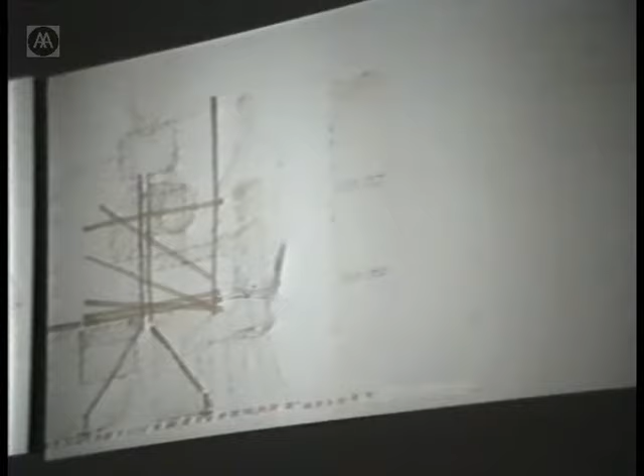Selecting from the many, many drawings that have been done on that project - many by myself, many by others, in our own office and in Tecno's office. And picking these really because they were the ones that Tecno selected of a sequence, extracts from a sequence that I did to try and communicate some of the thinking.

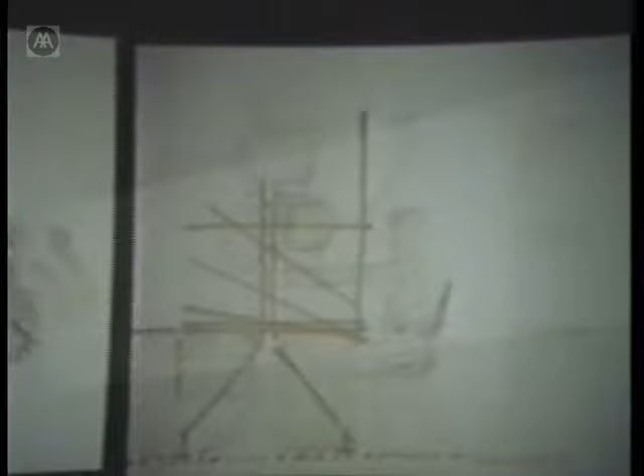Really an inventory of pieces that would come together. Heavy dependence on steel tube for economy, speed, and strength, and junction pieces. But not to talk about the technology, rather the lifestyle.

Two themes: the one on the left as we go through really being individual spaces, individual pieces, like sculpture in space. The sequence on the right-hand side being elements that would come together to make an environment, complete with its own services, its lighting. The last one was called by the director in Tecno, the Last Supper - the big group around the conference table.

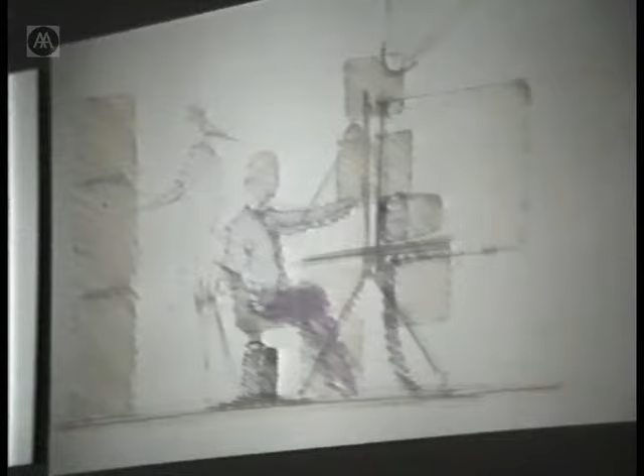Moving down in scale around suppers, the idea that it would respond not only to the right-hand side, creating environments for workstations, dealer desks, and so on, but on the left, dinner by candlelight or coffee tables.

And finally moving through to the two sample elements that were previewed in Milan. The freestanding table, many, many variations on it, and the kind of island units, the clusters that can make and create their own environments.

The launch in Milan was a feast of very simple food, beautifully prepared by those amazing chefs. And if I use the chef and the food and the restaurant analogy, it reminds me that in some countries the chef is a more esteemed, more respected person. Certainly in Italy, certainly in France and other countries I can think of, Japan. That's not so true in this country. And what goes for chefs also goes for architects too.

I think it runs a little deeper than that. I think the respect and the esteem for people who make things and service things is also at a pretty low ebb, and has been for a long time. And I find that very difficult to believe, because the creation, the making of anything seems to me one of the most noblest professions. And if we have achieved anything as architects, it's because of a genuine humility and respect for the people who make things.

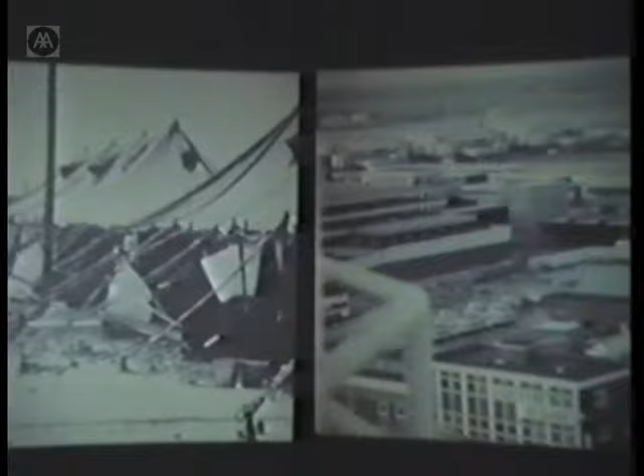Some meals are not humble, cozy, family affairs. They're grand state occasions, huge numbers, and they become more demanding because the distances are greater, and quality control is infinitely more difficult. Control of any kind is more difficult. And what goes for a banquet must surely go for a building too, especially buildings in a time of dramatic change. And I can't think of anything that signifies dramatic change in the 20th century more dramatically than an international airport.

And so this sequence is extracted from presentations made to British Airports Authority in connection with our work on the third London airport at Stansted. And maybe looking at Heathrow on the left in the 1940s, and Heathrow as it is on the right now, says more about dramatic and volatile change than anything I could say.

We went back through time. We contemplated the shift from an elitist, leisured class transport between the wars for few numbers to the explosion of mass travel, cheap travel for everyone as a prerogative, and everything that went with it, and all the stress. And it seemed that airports should not be about throughputs in terms of planes per hour, baggage per minute, but should be about people. I noticed coming to the office this afternoon, there was a kind of banner headline, 'Man goes on rampage in Heathrow.' The statistics around coronary arrests in airports is absolutely staggering. They are very stressful places.

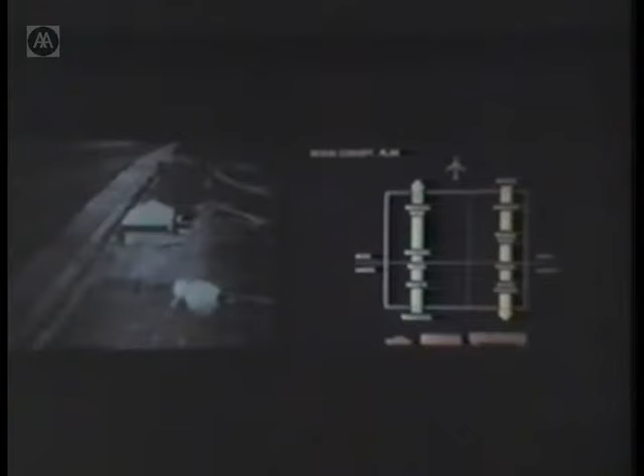Going back to an early airport, this I think is either Dallas or Houston in the early 30s, on the left-hand side. You were in no doubt where you were, no problems of orientation. You arrived by car, in this instance along a dirt track, and you saw the aircraft and walked towards it. And when you came back, you saw the car and walked towards it. Very, very simple.

You didn't need graphic designers to try and lead you through a maze to negotiate the standard international airport. So we endeavored to see whether we could find that kind of clarity and order, because that seems to be a prime role, bringing a sense of order into something that otherwise is anarchy and chaos. If that isn't also about architecture, it seems to me very fundamental.

So here, the idea of a large room which would put people first. You would walk towards the aircraft, there would be a land side and an air side, clearly visible as such, seemed to be in the spirit of going back to basics.

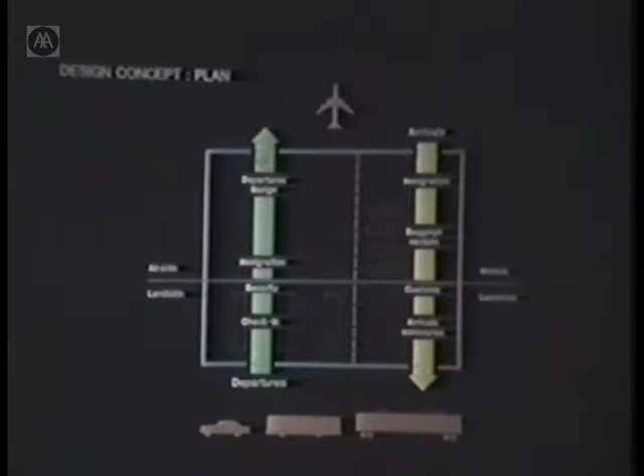That diagram in plan was shown to the British Airports Authority Board about a year and a half ago, nearly 2 years ago, in this form, with the proposition that you would enter on the left and walk across towards the aircraft. Minimum walking distance, no level changes.

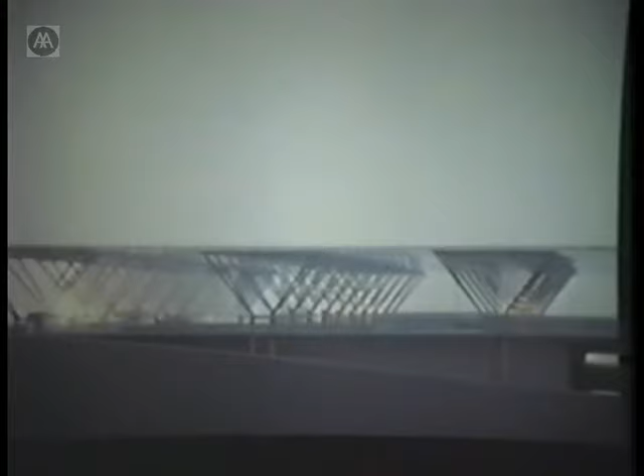The baggage would go down below, because the baggage doesn't know the difference if it has to change level, but people do. And it would also end up at the right point, because the baggage wants to get onto a truck which will take it to the aircraft. People want to get onto the aircraft at that level, or through some swift transportation system that will change the levels for them. In the final development, a track transit system.

Also, the roof would let the light through, and you try and achieve the most beautiful quality of light that the resources, the funds, the materials would allow you.

And you'd put all the things that drive that building in the basement where you could get at them very easily, so nothing really got in the way. So you'd take all the cobwebs out of the ceiling, all that festoon work of ducts, heavy metal, engineers' battleground, fluorescent light tubes, all the things that, in my personal view, get in the way and mar the potential for creating something that would be more uplifting and more beautiful.

That attempt at integration of the services, the lighting, into the structural fabric, that integration, I think is a relatively early preoccupation and picks up chords from the Lyons project, where the heating was interwoven into the floor fabric and the light tubes into the corrugations.

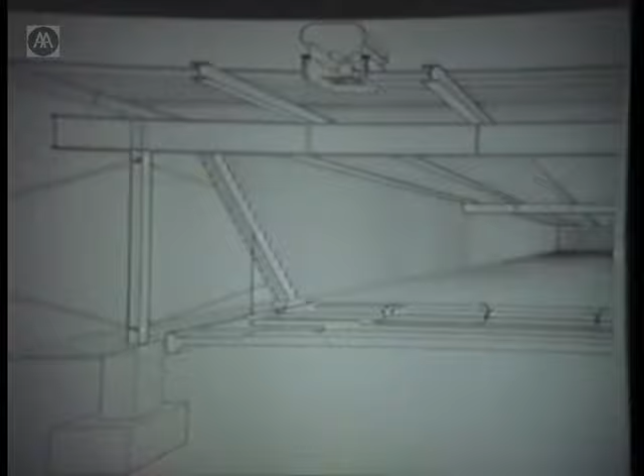And essentially, the space and the articulation, the modulation of that space by the structure was an important concern. And I think that that is something that has developed over a period of time.

The more recent study here from the Frankfurt project shows the attempt to refine, to skinny down that structure, to hone it, and again within that plane to integrate the services, the lighting, natural light, artificial light, and also a concern about the way that building would start to express itself more dramatically in terms of entrances than other attempts at that in the past, and also the way that it would relate to the ground.

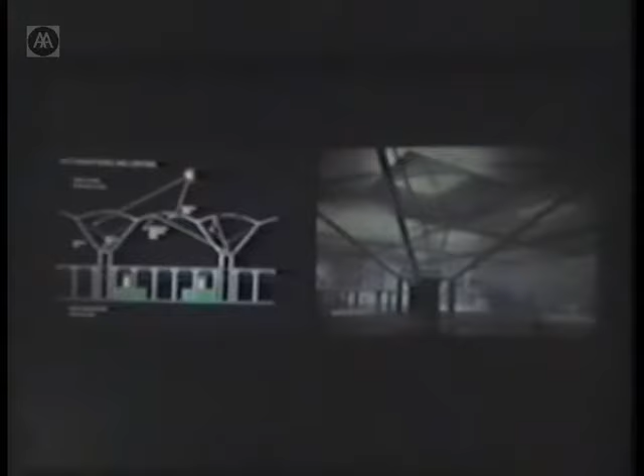Coming back to that diagram, we can see a part of the building diagrammed on the left, so that at the base of those structural trees, which would enable you to have a wide span structure at 36 meters, that in economy terms would break that down halfway to 18 meters, shells which would admit the light.

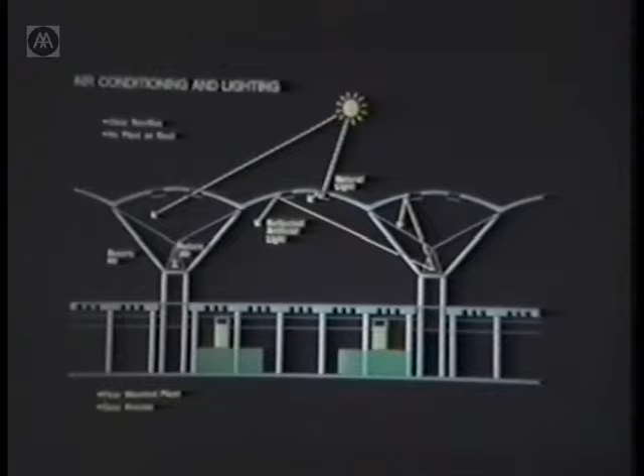You would also get controlled shafts of sunlight. And then, as the lighting level diminished outside, gradually, the internal artificial light located at the base of the trees would gradually come up, so that roof from the inside would act as a reflector. So you would get reflected light gently glowing and illuminating the whole space.

The interest in light, I can pick back to this project in terms of trying to pull light, scoop light, reflect sunlight into the heart of a deeper building. This is the Olsen project in the early 70s.

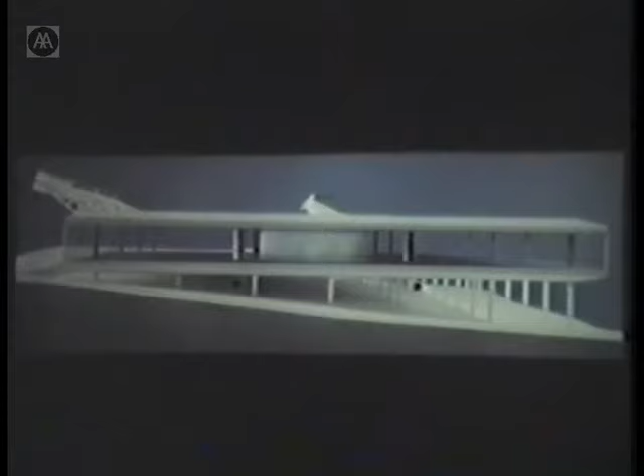The manifestation of that idea developed later in terms of the bank with an external array of mirrors, sunscoop as we called it, relating to an internal array of mirrors at the top of that main space.

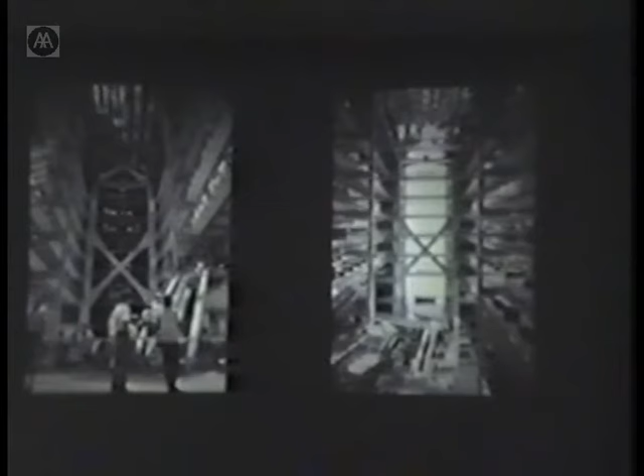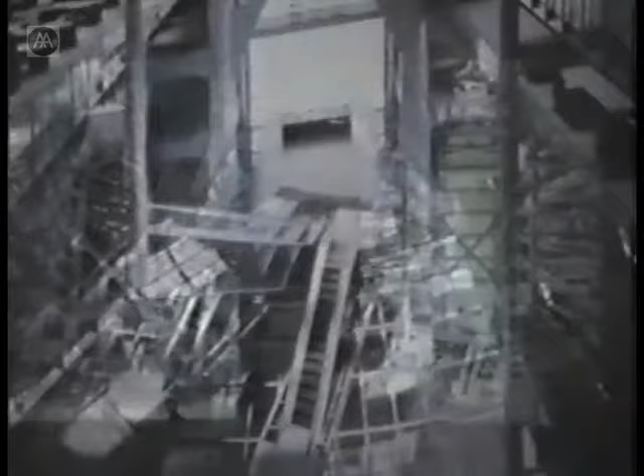Again, an attempt to transform the everyday use of a banking hall for cashing a check from something that would be a kind of humdrum experience to something that might actually be uplifting, attempting to sum up the spirit of that organization through the use of space. Many other things as well, but light is a powerful ingredient.

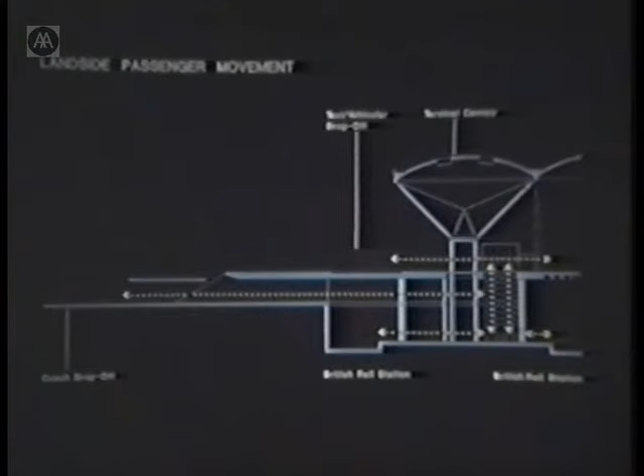An increasing concern about the way that functionally you enter buildings, so that the entrance will announce itself. If I talk about integration here, the diagram on the left shows the railway station, because this is linked to Liverpool Street, pulled physically into the building, so it's not a remote station. The actual station is part of the airport. Again, trying to integrate and pull those transportation systems to knit them together.

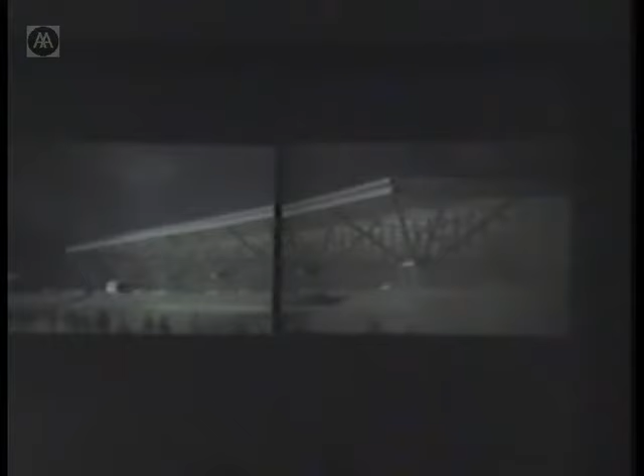If we look at the entrance here, this building intended to grow lengthwise, the attempt to suppress and control the inevitable visual chaos of large-scale parking and coach movements by, I suppose, an interpretation of the 18th century device of a ha-ha, to depress it just enough so that it's out of the sight lines. The building then sits on the high ground, which also enables economically that undercroft to be incorporated into the building.

If that was the land side, this is the air side, which now handles the track transit system, which takes you, effects the changes of level, and takes you to the satellites. And then a montage giving an impression of how the building might feel at night.

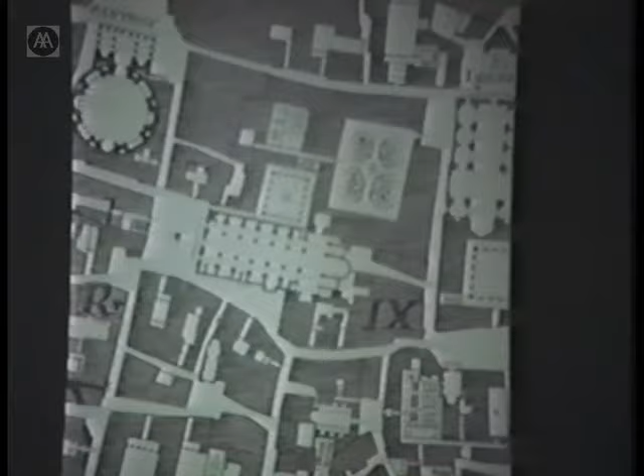I've always had a personal interest in what I would call urban linkages. I took this slide on the left of the Galleria, one of my favorite places and spaces, in 1958 as a student, and I've used it continually and revisited many times, fascinated by the way urban routes can penetrate through building blocks and add another dimension and ingredient of public involvement in what would otherwise be private domains.

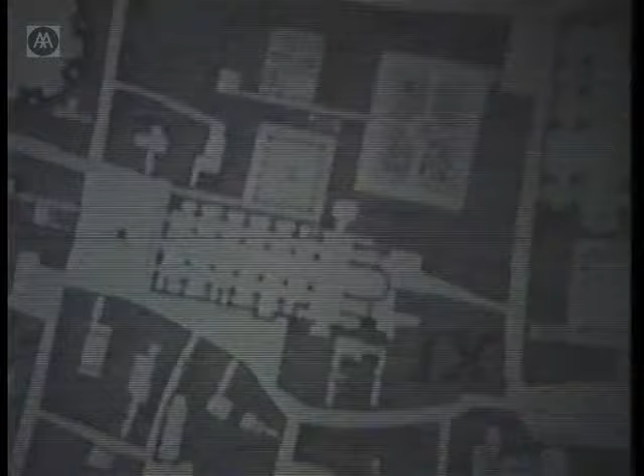The Nolli plan of Rome on the right-hand side, and some recent projects effecting a shift, a change, more varied opportunities.

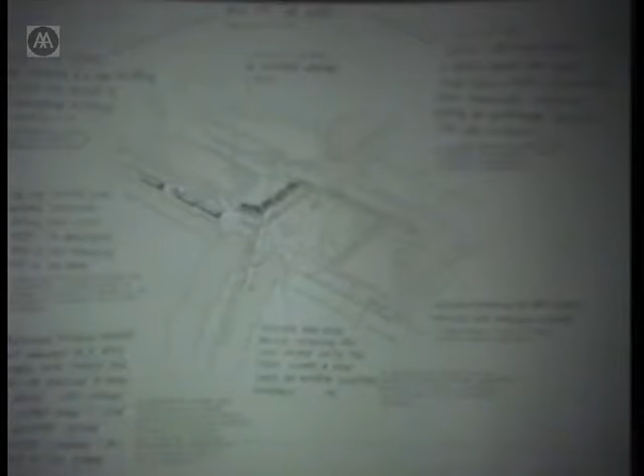For example, the Nîmes project here, an international competition, was to develop a combined gallery for contemporary art and the médiathèque on a site opposite the Maison Carrée, this astounding Roman temple. On the site opposite, a car park, originally occupied by an opera house built the last century, demolished by fire almost totally in 1953.

Our proposition was that the space was great. The original building, which had since burnt down, just about got it right in terms of its height and massing. The spaces left on the edge were good streets, potentially good streets, and it really was fantastic - one should respect it and be informed by the scale of what had gone before.

And the page on the right makes those points, one of a number of pages prepared for the original competition report. It's interesting that in a competition there can be such an extraordinary diversity of approaches.

For example, in this newspaper cutting here is the scheme we proposed, which recreated dimensionally the original facade, respected the geometry, recreated the streets around the edge, and left this space totally alone as it was, even suggesting they should keep the traffic running through it, for reasons I won't go into now.

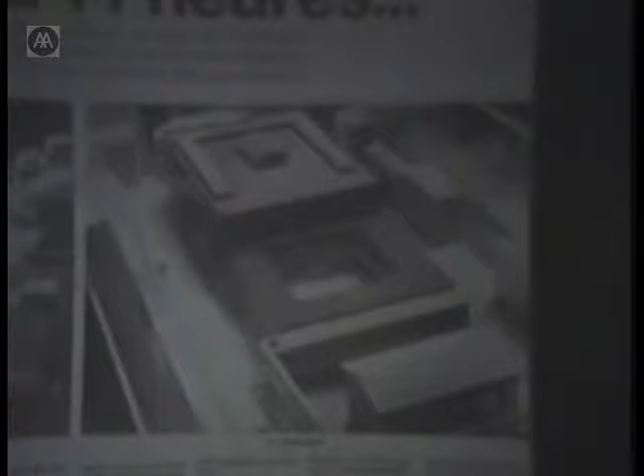Jean Nouvel, an architect I respect enormously, proposed a scheme which in effect created a glass lake and opened up the whole space totally. Cesar Pelli, on the other hand, went right out and across the road and hugged the building. And Frank Gehry created a kind of organic mountain on the site, a kind of mediator building between the temple and the site.

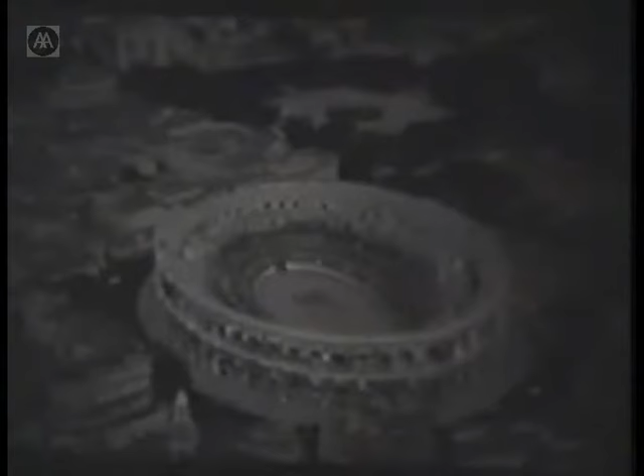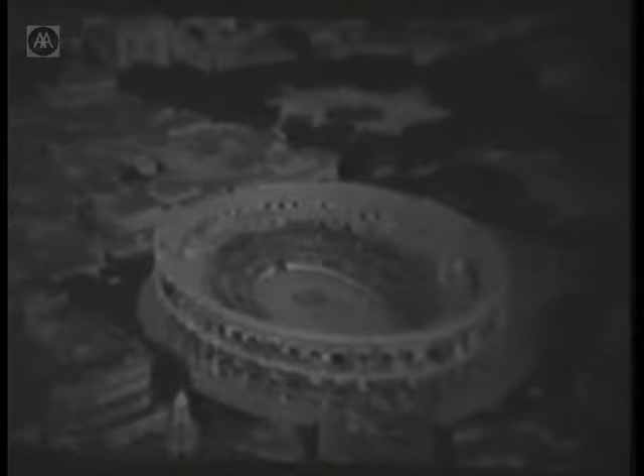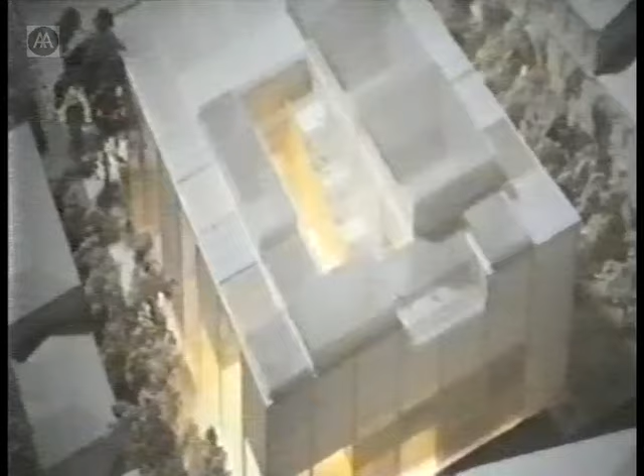The building, as it developed over a period of time, was informed by the tradition of spaces and courtyards in traditional buildings in and around Nîmes, and was a powerful determinant around the idea to create the equivalent of that in the heart of the building as an open space with terraces, with steps, that would enable you as a member of the public to walk through the building and up to the roof terraces without necessarily paying or participating.

Feeling that you had to, as it were, go to a gallery or access the library or do all those amazing things you can do in Médiathèque would be an evening's conversation in itself, drawing some very dramatic differences between attitudes and states of mind towards new generations between France and other countries, and this country in particular.

Fascinating, peripheral conversation. Coming back to the architecture, the roof has been lifted off some of the spaces, revealing on this top floor a sequence of rooms — some tall, some skinny, some fat, a variety of rooms. No attempt to go for a flexible space, although quite possible in terms of a frame structure to reposition walls. The floor below, for temporary exhibitions, has an emphasis on flexibility, but there's a deliberate sequencing of spaces here in this gallery, again with a very strong emphasis on top light.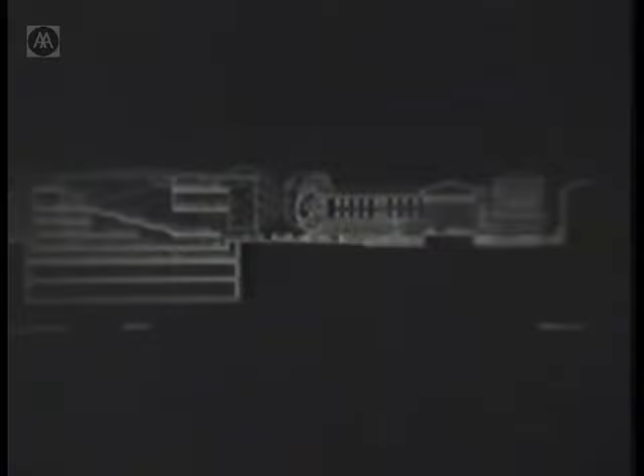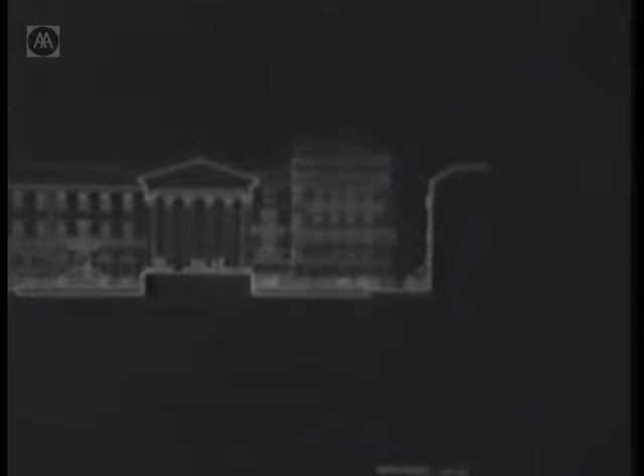The routes you can start to see from the square up through to the roof terraces. You can also see that those activities which need light gravitate towards the top, and those more concerned with storage move down. The building substantially digs into the ground and then pulls back at the sides with many devices to get light through the edges down into the lower reaches of the building, coming back again to that humanizing quality of light, that quest to infuse the spaces in the building at whatever level.

You are never in any doubt in orientation of where you are. You're aware of a very beautiful quality of light, but interestingly not dependent on glass.

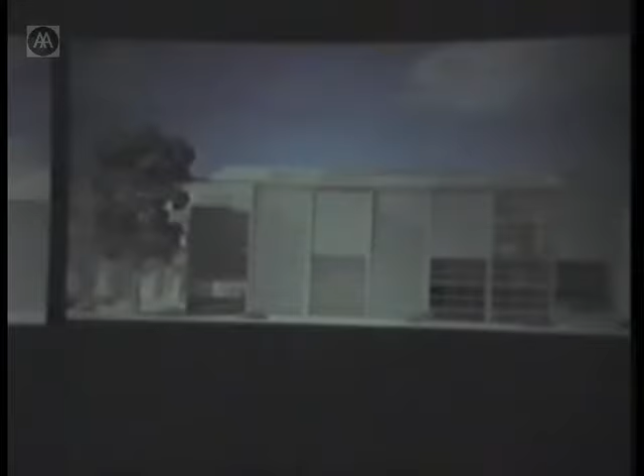Extraordinary beautiful qualities of translucency, relationship with the outside, and an attempt on this building to develop a palette of facade materials that would modulate light by grillages and enable you to see in, filter, provide insulation with layers that would also transmit light of a glowing nature, and in turn the atmosphere would change during the night.

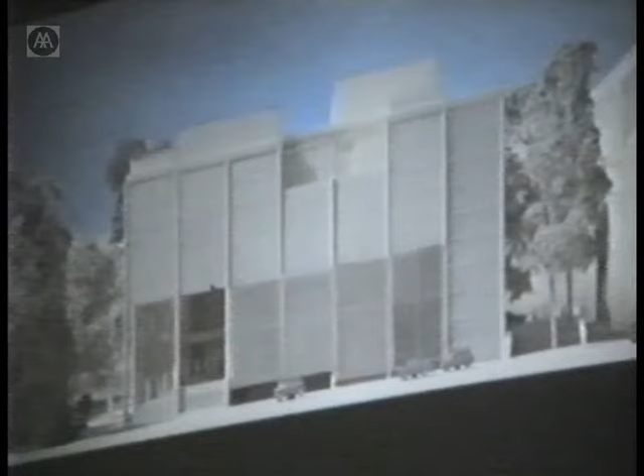The entrances are always pushed back on corners, recessed, with small porticos for protection, for invitation.

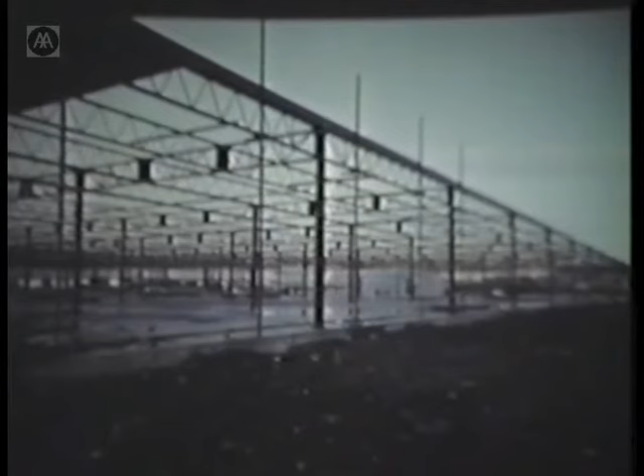In many respects, some quite close parallels with very economical structures. In this instance, on the IBM building, the attempt to find a low-cost structure — the equivalent of that in the south of France is a very simple concrete frame, 6 meters square.

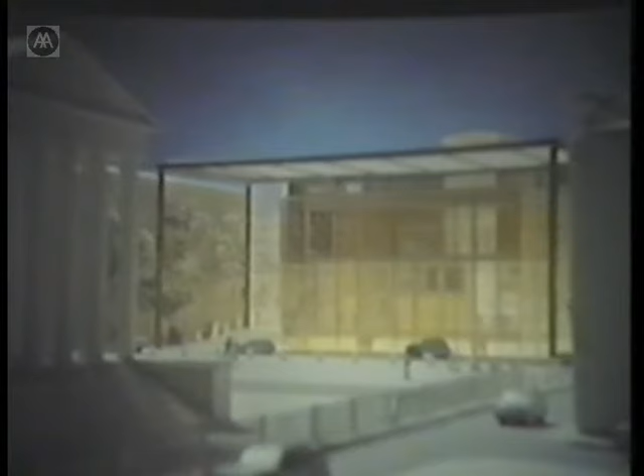For me, this is very much in an ongoing tradition of trying to find simple solutions, and generally a concern for the distribution of a building budget in terms of the priorities.

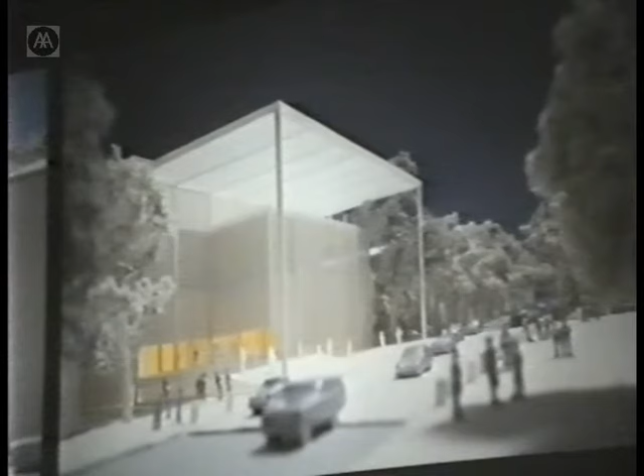These two slides make the point about the manner in which the building can be entered: the gesture of a portico, the protection from the weather, the symbolic welcoming, and also the protection, the shading for the terraces, very much picking up a similar device in 20th century terms to the Maison Carrée itself.

And also being informed by that tradition in France, and particularly in the south, of weather protection, the terrace — the very interesting inside-outside, public-private world of that terrace in terms of the very urban and civilized outdoor cafe.

Moving a little further north to the Langham, the BBC project, as we described it at the outset, a new headquarters for the BBC, which would have to work from the inside out. It would have to answer those very complex requirements, social and technological, of a broadcasting centre in the 20th century moving into the 21st century.

It would obviously, in urban terms, on quite a sensitive and challenging site, have to work from the outside in as well as the inside out. It's really on that urban context that I'm going to touch on, not leaving the rest for granted — it's an important generator, but shifting the emphasis and going back in time.

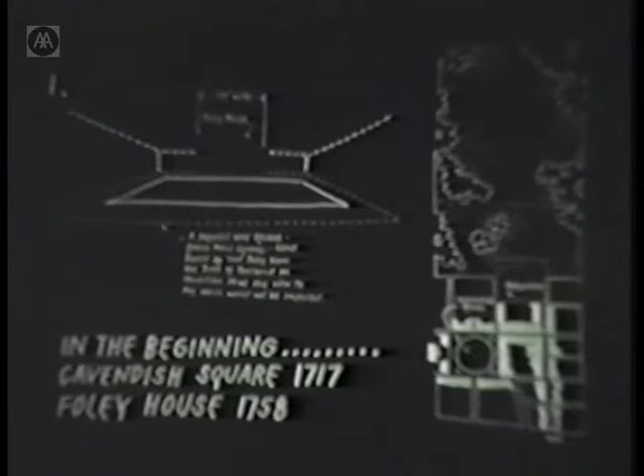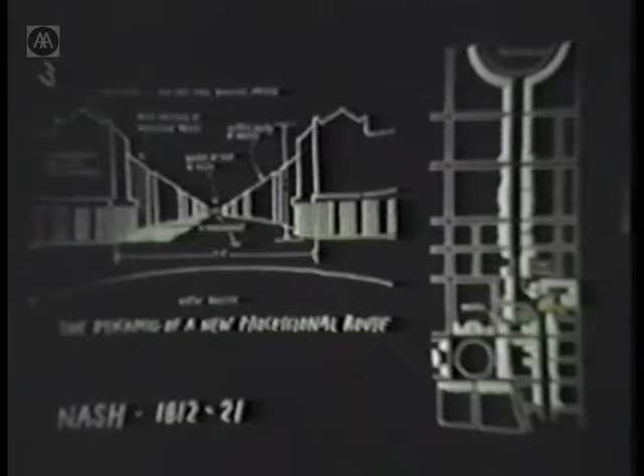What generated Portland Place: the view from Foley House, which originally sat on the Langham site, the transition through the Adam Brothers, the change from a cul-de-sac to a processional route through to the 1920s, somewhere in the middle, and 1864, the blast of the existing Langham Hotel exploding on the site at the head of Portland Place.

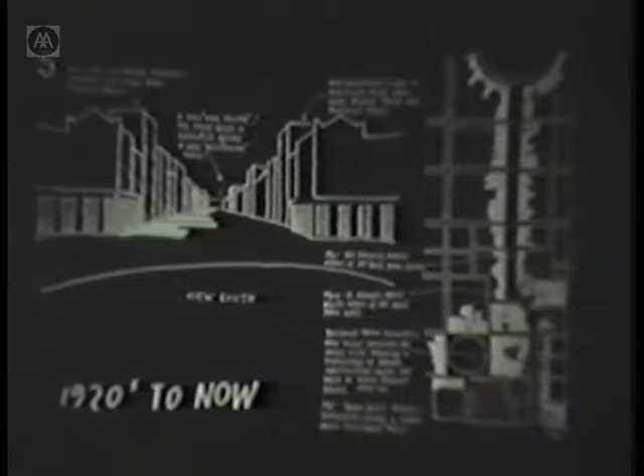Some of the shifts — social, like mass shopping on Regent Street; technological, the steel frame that made it possible, and Portland stone which then moved down as a cladding material into Portland Place, replacing the brick of Adam, which was in turn replaced before that by the stucco of Nash.

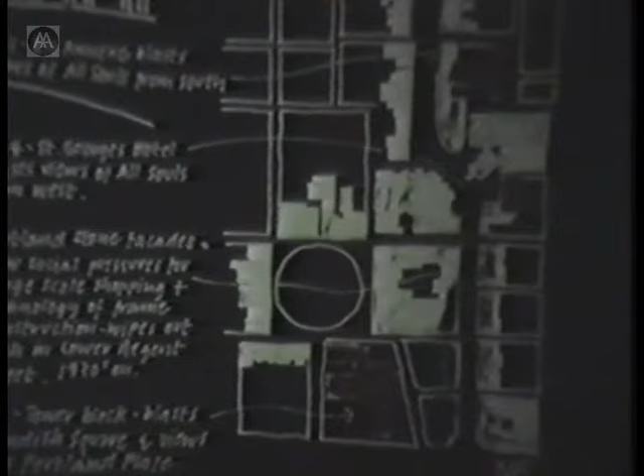In other words, a pattern, totally organic, evolving pattern of change. And very much in that spirit, the replacement of the Langham Hotel for the BBC. The project aborted due to a rationalization program which moved them from the center to the White City.

I guess that really we were responsible for that, because during the competition in our research, which we pursued with vigor after we were appointed, we noted the BBC had some 20 properties within walking distance of the site, and that they had in excess of 1 million square feet. We suggested a rationalization program that would essentially, for good economical reasons as well as problems of communication, strip that away

That process was taken further and consolidated out of the centre into White City and suburbia. It's out of the context of an architectural discussion.

I wear a different hat as a license fee payer and have a view that maybe an institution as hallowed as the BBC should have a central London presence and set an example instead of pulling out to go to suburbia, to the dogs to White City, if you like. But that is another aspect.

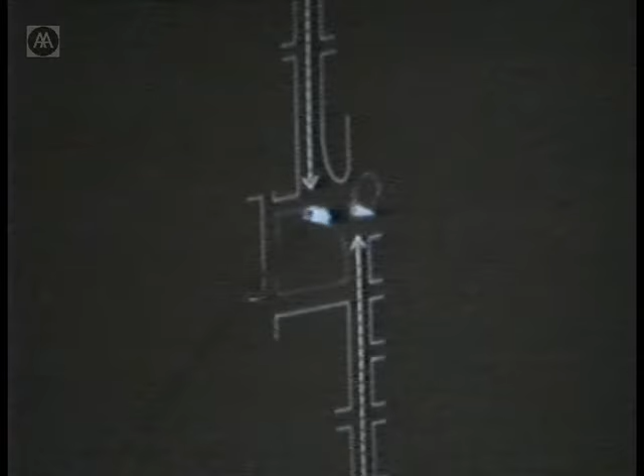A building that would sit quite reticently in the main facade line here, respecting the fact that the main termination from the south to the north, handled by All Souls, and trying in the spirit to respond to that here.

Interestingly, once you had consolidated onto the existing broadcasting house and its extension here, and a new building here, then the center of gravity of that total development was right at this point here, and a very logical point at which to put the main vertical circulation, especially if you then link the two buildings together underground, so you could get good pedestrian access and good service access.

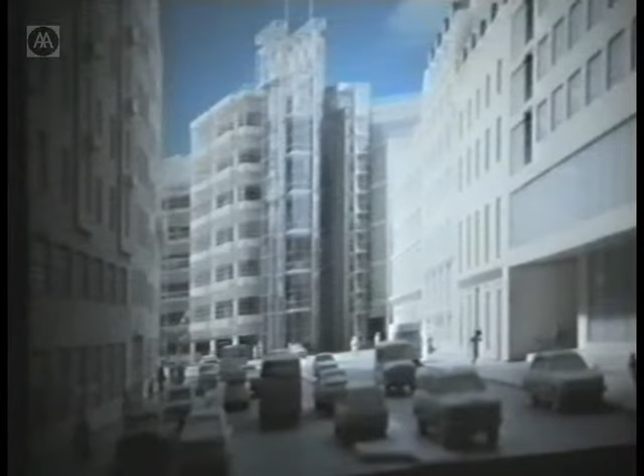It seemed that the Langham Hotel on the right-hand side had never really quite made up its mind in terms of the role that it was playing at the end of Portland Place. It was, at a first glance, absolutely symmetrical and would give you the impression that there was either a T-junction or a dead end. It wasn't quite symmetrical, but symmetrically enough to make you believe that. But the reality was really something else.

This was a route that turned a corner, a very, very important knuckle. The attempt to bring that circulation together and to relate it as a vertical feature, and then, as you would start to turn the corner, to see the way in which that could open up and a dialogue take place between that building, the space it created, and All Souls, was a very, very interesting opportunity.

The exterior of the building, the way that it could be informed by the inner workings, by the studio zones, by the needs for flexibility, the very, very complex internal arrangements which generated very large floor-to-floor distances, extraordinarily heavy loads, minimum spans which were still quite generous, led to a structure which was very, very massive, very dominant.

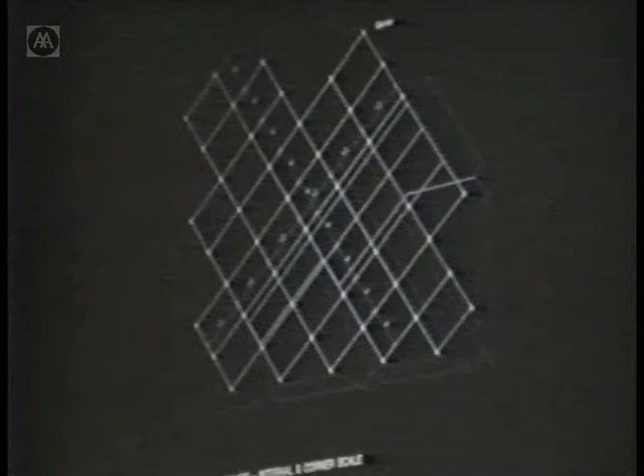And a very conscious decision to pull that structure inboard and then to support the edge with a higher frequency edge necklace that would be expressed on the exterior, to break down the scale in urban terms and also break down the scale in structural terms to more, finer members.

A device in a way we'd used in an earlier building, where we had hugged the edge of a site to create a building that would be low and sympathetic in the winding medieval geometry of streets in Ipswich. So an edge necklace inboard, then a square geometry that would relate to the internal requirements.

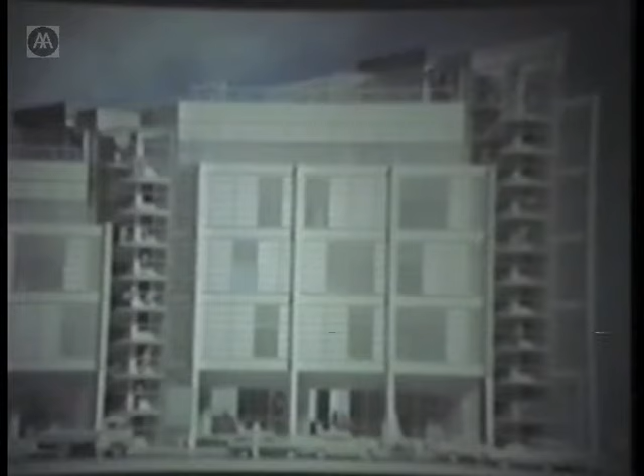Very similar in spirit, but in this instance the demands in urban terms and in social, technological terms are much greater. There's a breakdown expressed externally of the movement, the service, the inner organization of the building, breaking the scale down into individual blocks which would be high where they'd need to be high, where the vistas were longer, more powerful, more compelling, and more modest to relate to smaller scale neighbors around the Georgian Square.

So you can see this build up at several scales: the scale of the individual block, the scale of the tower that separates them, the structure which then modulates that, and then in turn the panels and the mullions.

As a belief, this building should be fixed in its external expression. The change would take place within it, and the facade could change in terms of the proportion of that which would be translucent, would be glass. But it wasn't necessary for the exterior of this building to be all-dancing, all-singing, totally movable. That wasn't necessary to achieve flexibility in this kind of building.

The way that would express itself three-dimensionally, the manner in which those columns, as you viewed them more obliquely, would stack, would give something more attenuated, more solid, was studied three-dimensionally with very large study models and many photographs. The roof of the building is very much in the spirit of the Willis Faber building.

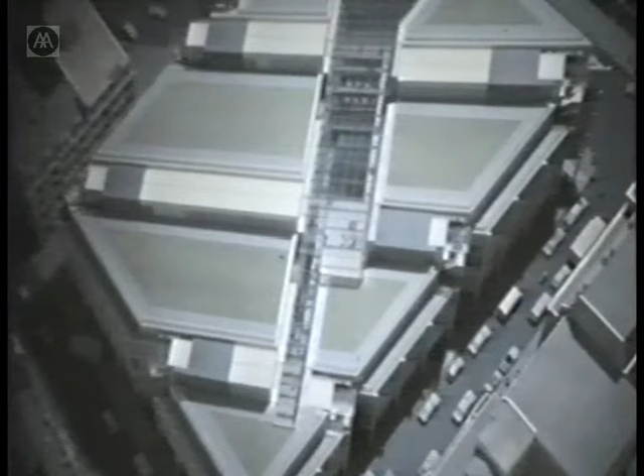Really roofs should be for people. They should be to contemplate the view, to walk out, sunbathe, and basically the mechanical equipment can go somewhere else because it doesn't know the difference, like the baggage in the airport.

So the idea of the undercrofts, of the service, of integrating and being very discreet about that, and talking about the creation of a space that would work in public terms, a meeting point where you could view exhibitions, see television in action, watch broadcasting, go into layer after layer deeper into the archives of special access clubs, or just meet for a coffee. A good place to be, a good meeting point.

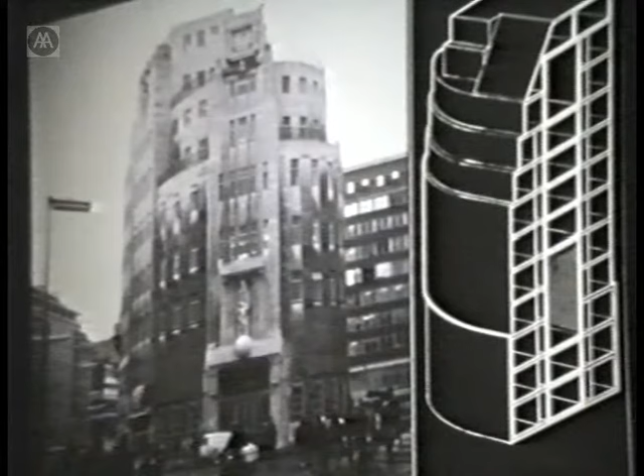It seemed that was really what a headquarters for an institution like the BBC should be now and into the next century: accessible, open, participatory, and the exact opposite of what it might have been in the 1930s.

The whole social interaction of groups within the overall umbrella of the BBC was very, very interesting. We were told at the outset it was something like a loose association of warring tribes, incredible rivalry, great competition, an amazing creative hothouse of many diverse groups.

Identities coming out like the signs on the door, which at one point I tried to explain to myself as a kind of game of Russian dolls. The BBC would be like a big doll—you'd open it up and find more dolls, and keep opening them up and find more breakdowns of individuals, in some cases small groups, teams, each with their own individual identity.

An absolutely fascinating challenge. I think Eric Lyons, who I was reading, said that you are never the same after a competition—any competition. Certainly this, and any competition we've participated in, whether we've won and built, lost, or won and not built, you are undeniably changed as a consequence of it, and infinitely richer. I have no doubt in my own mind about that.

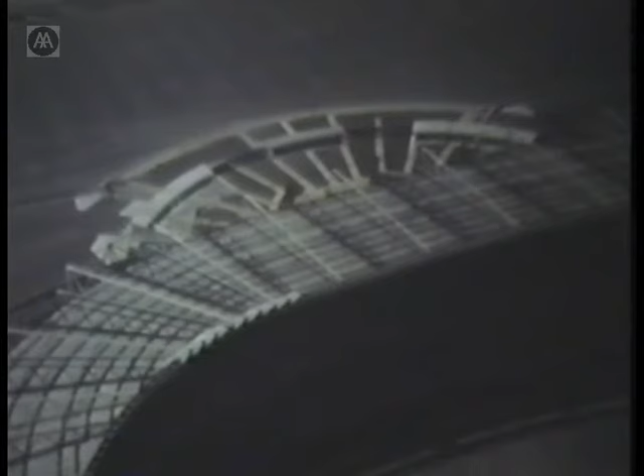I believe that very seriously. One of the magical qualities that was sought was the thing that makes this company tick: its ability to be many different things under an individual umbrella. If it was the earthquake which made this building a necessity - since it demolished, tragically, a number of individual buildings in the earthquake-impacted area in Mexico City - then bringing them all together on one site was important, but also important to strengthen and respect the individual identities of those particular companies.

One of the inspirations which for me is very powerful is this: some buildings which have no external form as such. I've tried to photograph the souk in Marrakesh, the Casbah there - very difficult to actually find. It doesn't have an external form as such, but it's an amazing magic world inside, of prime routes which break down into subsidiary routes, some of which end in cul-de-sacs, some of which lead you into other routes, and an amazing kind of richness and diversity of experiences.

And the site has at its heart a very large quarry - something like 50 feet deep, where this volcanic lava is exposed. One of the things which emerged in discussions with the client was the possibility, instead of blasting that, which is quite traditional and a very economical way of actually losing it, to take the quarry and create a kind of secret place in the heart of the building where if you went down into it, you would actually be cut off by sight lines from the visions of the building around it.

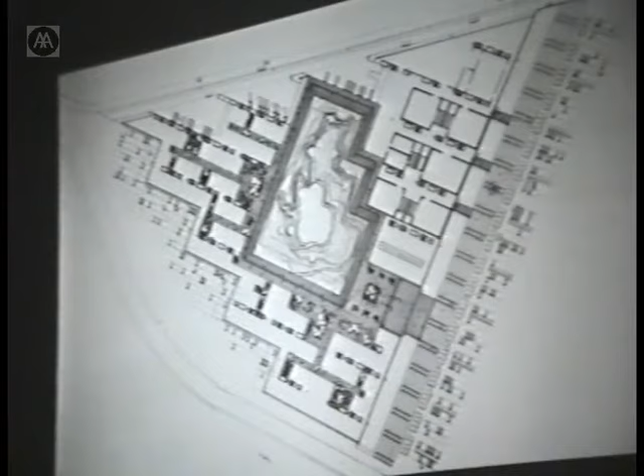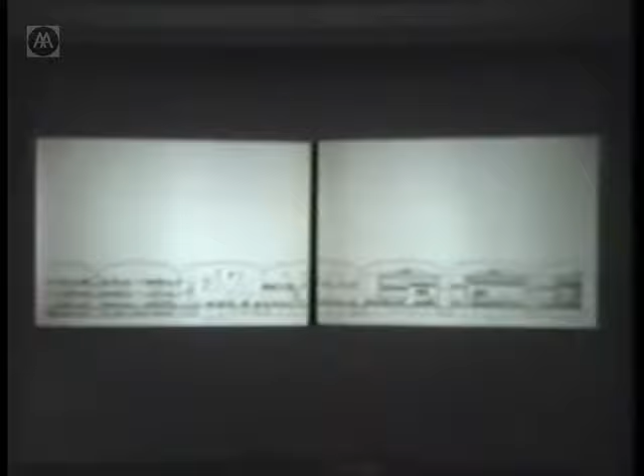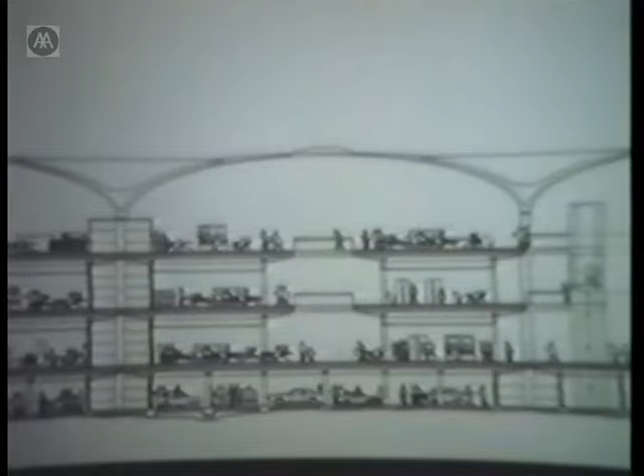Under a graceful roof umbrella, there would also be a kind of catchment umbrella, literally, to be able to scoop the torrential rainfall and channel it down the columns to a reservoir so that it would be self-sufficient.

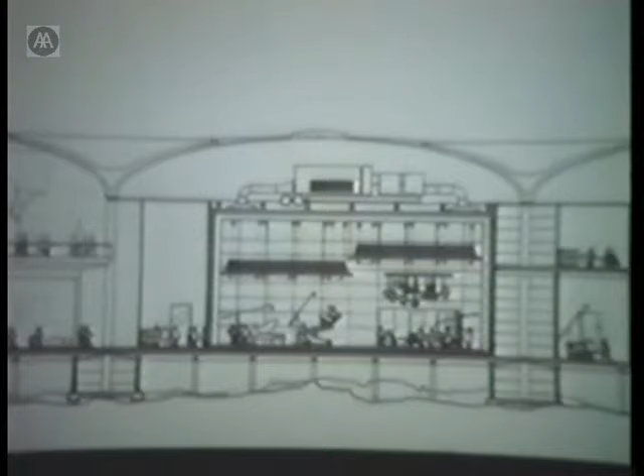The idea of the undercroft, where you would have the heavy mechanical plant, where you could change it, where you could get at it, where you would lift this building above this quite difficult site - because the problem with lava is you don't know where the fissures, the cracks, the cavities are. It can be dense and you maybe can build straight on it, or you can go right down and it's like a crunchy bar - you can just go straight through it, you can hit a large hole.

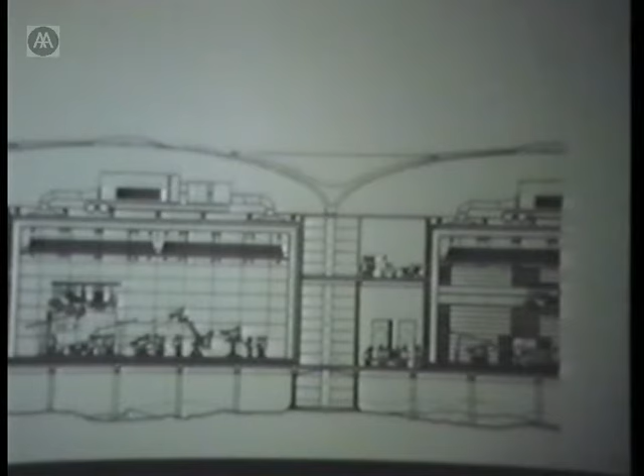So within this overall umbrella, on top of the undercroft, which is for cars, which is for plant, you have the opportunity of creating quite large, generous spaces. You can stack offices in - everything is walk-up, and under top light at the apex of these, the structural unit incidentally being this unit here.

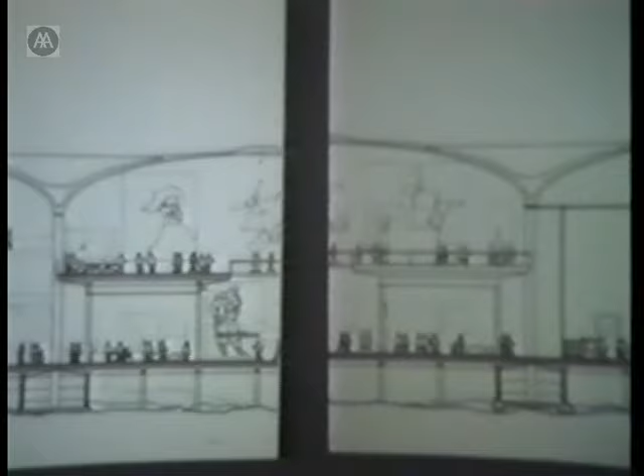Taking full advantage of a very sophisticated concrete industry, with an awareness that you really should not, could not import a great deal into Mexico because of all kinds of economic barriers and penalties. So optimizing on the capabilities of that industry, using steel very modestly here, as part of that composite structural approach.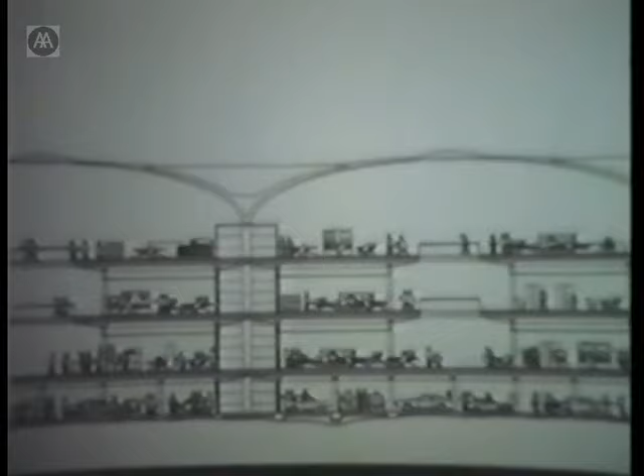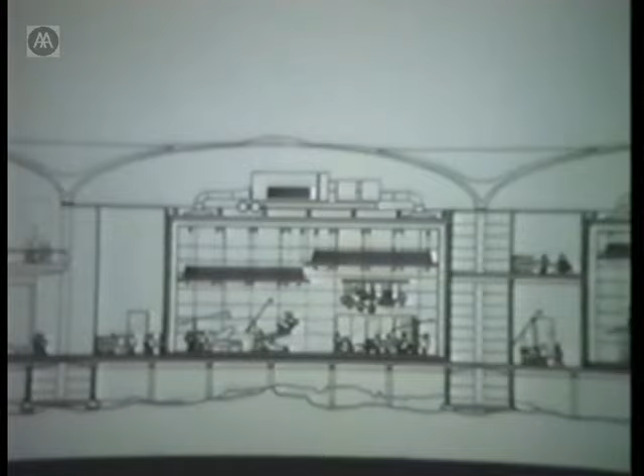And as I say, within that, flexibly, you can put studio boxes, which, where they do require their own overhead local servicing, again, is within that overall unifying roof umbrella. Some of the studies on the roof, the structure, the spaces, changed since this drawing was done.

At the last meeting, a very clear decision was taken with the client that basically there shouldn't be a protected outside area around there - the glass should go right to the edge. It would be far more dramatic. You get a much more dramatic contrast between the world outside, the nature of torrential rainfall, the quarry, and then the inner world of this particular complex.

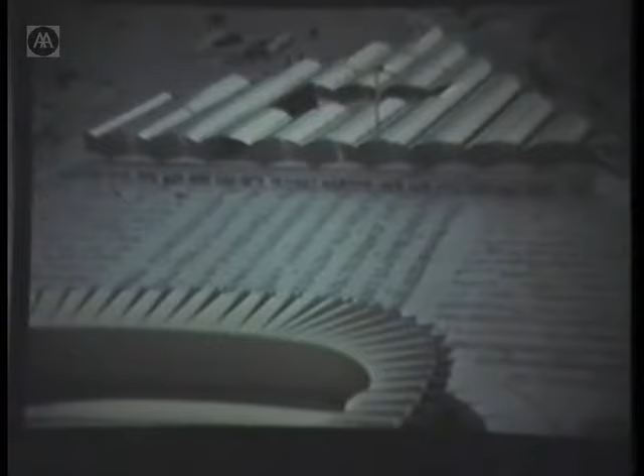And finally on that scheme, some of the early model studies fronting the building and sharing the car park with the Azteca Stadium, because that rather usefully works on a time cycle. At the peaks for this building, the Azteca Stadium isn't used, and the reverse is also true, so it can optimize on that parking resource and creates a lake reflecting pool. You enter over bridges; the main entrance is here, with a subsidiary entrance to audience studios, more private aspects separated along that facade, which is a kind of pedestrian facade as opposed to the road facade on the other edge.

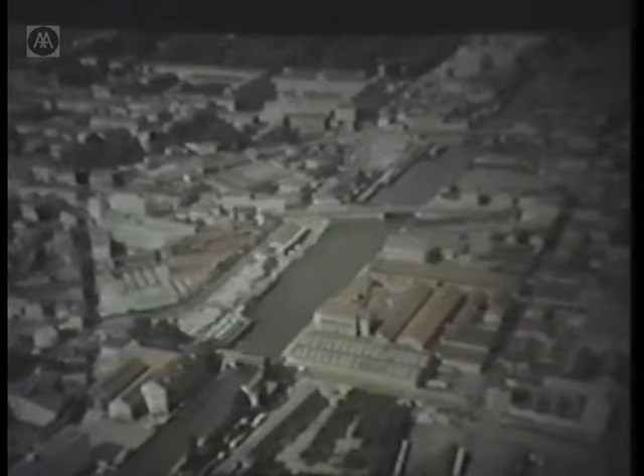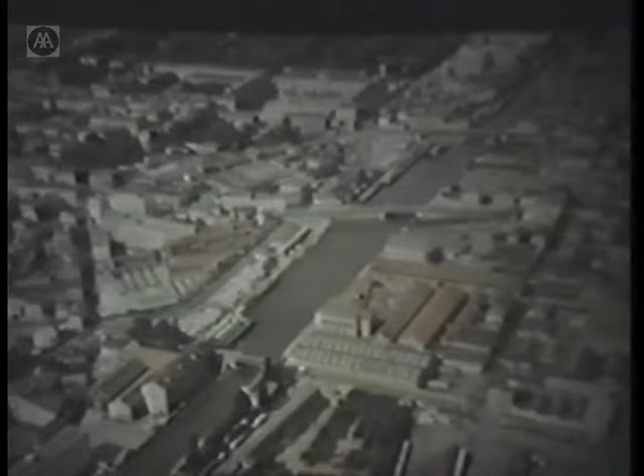Back into Europe, into France, Nancy - a commission to examine an urban study as a related part of a project to provide a new community hall that would attempt to cope with the inner city problems of Nancy. Nancy is an amazing city, beautifully preserved, with an extraordinary 18th century core, which is here, and the site to the right of the water, and also slightly to the left of it, at the break point between the inner city and the outer city - a decayed area, declining industries, including the canal and industries around it. The challenge really was to transform that and knit together the outer city, bring it closer, and try to alleviate a number of the social problems that they found themselves with.

This is the Place Stanislas, an extraordinary 18th century space, which we studied along with the other related spaces - analyzed them in dimensions, cross-section, planting trees, floor textures, to see what clues might emerge in terms of the site in question. Place d'Alliance, its dimensions, cross-sections, and moving into the site, working with the community and identifying those activities that might be appropriate on that site.

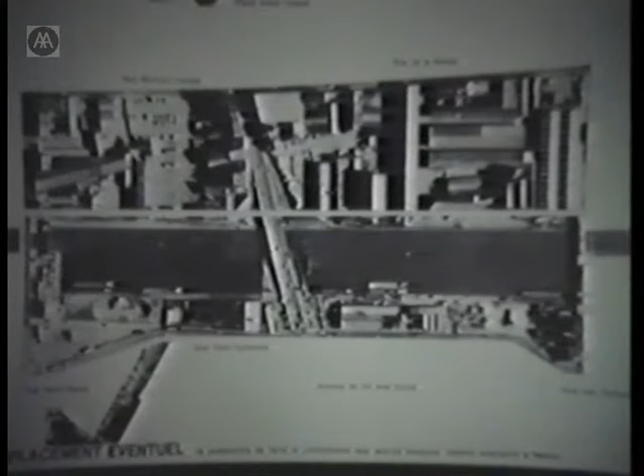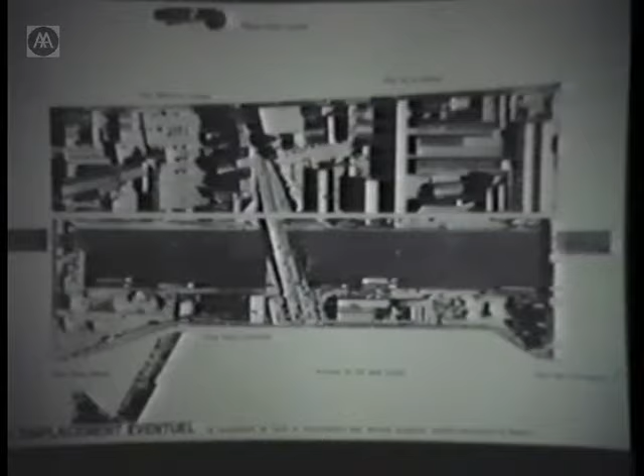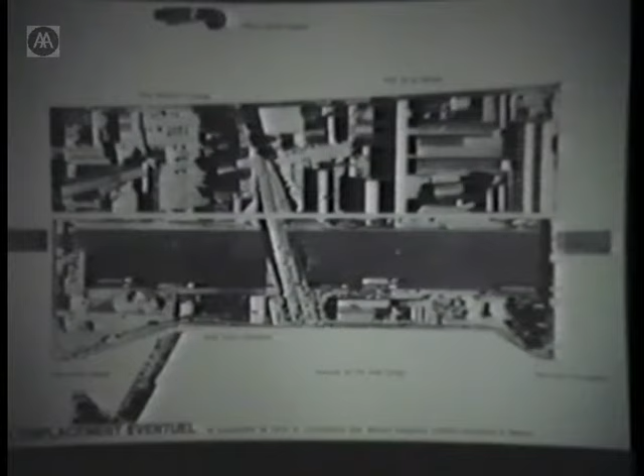The initial commission this generated out of was an invitation to design a large meeting hall for some 4,000 people and a room for 1,000 people next to it, that would cater for wide-ranging events from dinners to conferences, rock concerts, whatever - a generator that would overcome some of the social difficulties and also be a pilot project to attempt to revive the ailing steel industry, which has quite a strong presence in Nancy. So the activities there range from housing to a regional government centre, the hall in question, studios, galleries, and our proposition was really rooted in some very, very simple premises.

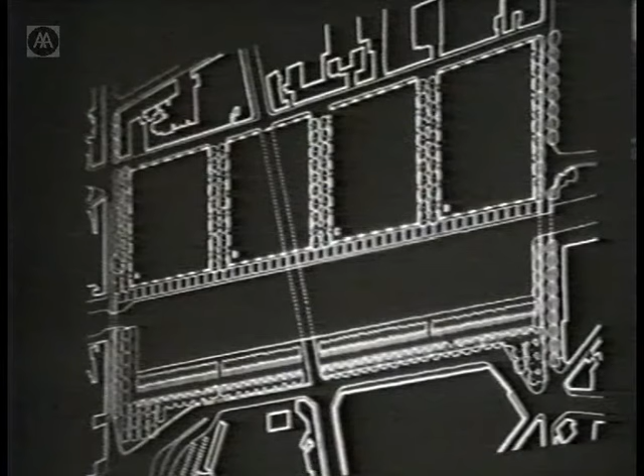The walk along the water was really absolutely fantastic, a great place to be. It seemed that that should be emphasized, reinforced, and informed by the block dimensions in the rest of Nancy, the historic part, which seemed to work very well - be very accommodating, a very, very simple subdivision into blocks, which could then be capable of being developed over time, at different points in time, by different architects as appropriate. And also, you could do an amazing amount now simply by just planting trees. There is this incredible tradition in this city of tree planting, and it would be transforming as an element.

So by planting trees, by accepting the imposition of a very, very simple grid, by using what was there - some very good buildings, the one on the right is fantastic - keep them, use them, integrate them.

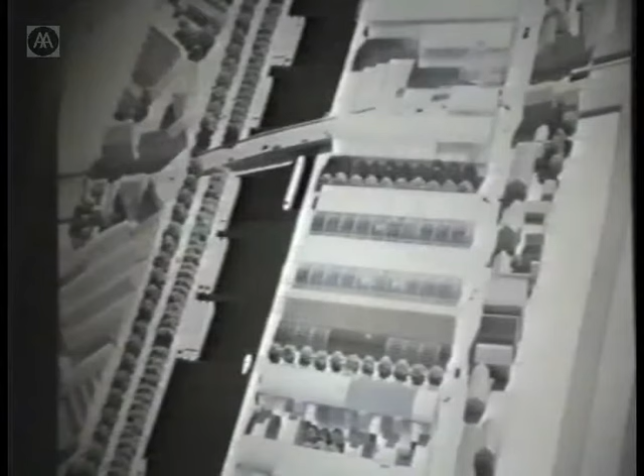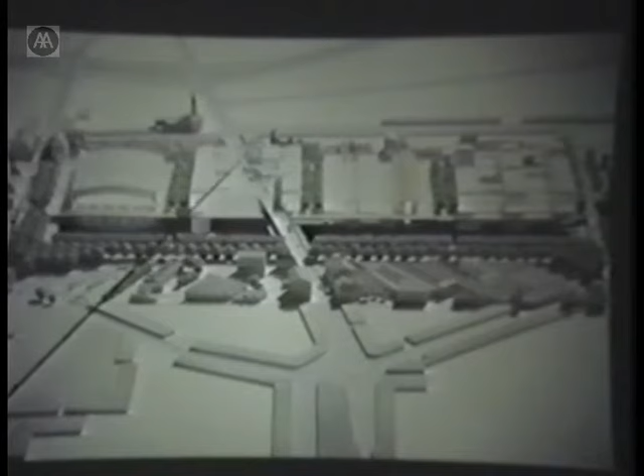And some of the studies, as for instance, looking at that - courtyard housing here, again feeding off the local tradition of smaller courtyard housing, suggesting ways in which some of the traditional devices of Nancy, which has a series of ports - gateways at various points of the city that you physically enter through - and suggesting the possibilities in a regional government centre here of building around and actually creating a new gateway through this existing road, which would be preserved, a very important traffic route and bridge.

In other words, making the best of what was there and enabling something that could develop over time in a tradition that was familiar. Now, Nancy is a lot of other things as well - it's the birthplace of Jean Prouvé, and it figures in any study of Art Nouveau. There are some extraordinary and beautiful structures which sit there neglected, waiting to be discovered.

Now wonderfully restored. I was intrigued to come across a book which I bought recently by Corbusier on aircraft, and intrigued by his love affair with aviation, which I share passionately. It was also coincidental that a lot of the conversations I had with Jean Prouvé were about gliding. He was a passionate glider freak. And I find the analogies, the links with aviation, with other lateral industries, quite intriguing, related to architecture at many levels.